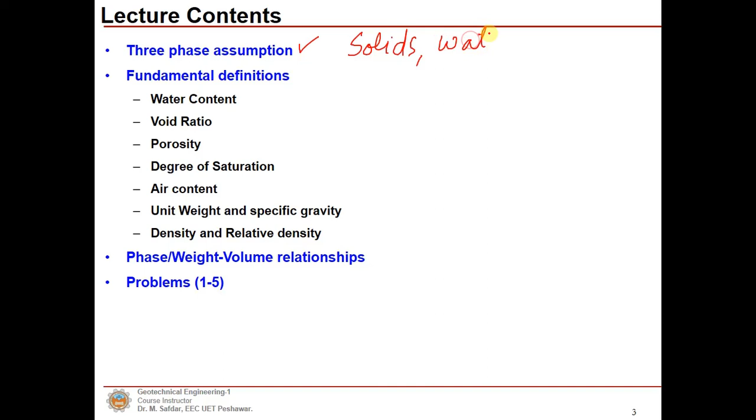So first we will start with understanding the three-phase assumption, which is that soil contains solids, water, and air if it's partially saturated or unsaturated soil. Then we will study and learn about fundamental definitions such as water content, void ratio, porosity, degree of saturation, air content, unit weight, specific gravity, density, relative density, and we will derive a few phase or weight volume relationships.

At the end of today's lecture, we will solve a few problems related to those relationships.

So starting with the three-phase assumption, soils generally contain soil grains, water and air, which are known as the three phases. Now the relative proportions of these three phases play an important role in the engineering behavior of the soils.

We also discussed about the void spaces. These void spaces may contain water and air, and in dry condition water will be missing, only air will be there, and in fully saturated condition air will be absent and water will be present there in the void spaces.

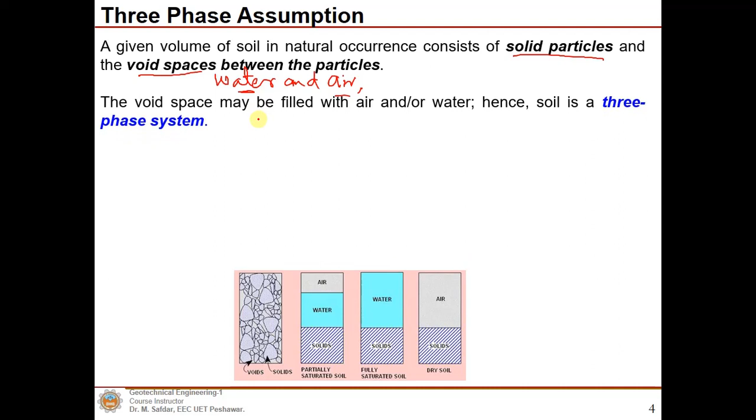Now if there is no water in the void space, that is a dry soil. If the void spaces are filled with water, then we can call that a fully saturated soil. Moist or partially saturated soils have three phases like air, water and solids.

What we are trying here is we are idealizing the real soil sample.

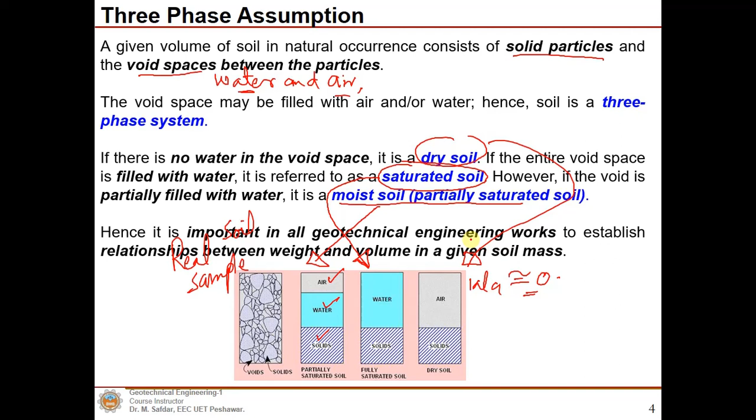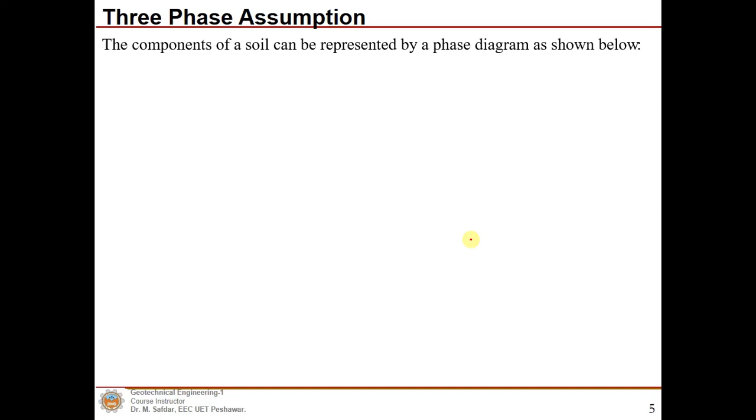So it is important in all geotechnical engineering works to establish relationships between the weight of air, weight of water, weight of solids, where the weight of air is negligible, it is taken as 0. So if we are having weight and volume relations, that will affect the engineering behavior of soils. Therefore, a geotechnical engineer must understand and learn about the phase relationships or weight volume relationships of each phase.

This is a real soil sample having solid particles present here, and void spaces. If they are filled with water, that would be fully saturated soil.

Here as well, these void spaces, if they are filled with water, you can call that saturated soil. If it's filled with air, then it's dry soil.

So we can idealize this soil having the total weight, and we can also idealize that as total volume in terms of a phase or block diagram, where we are saying that, for example, this is weight of air, which is negligible, equal to 0. Weight of water from here till here, that is weight of water, and weight of solids.

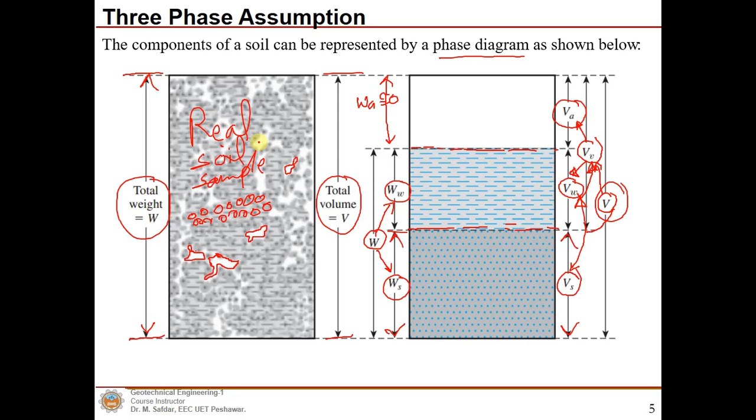Now the volume of solids here, and if we add the volume of voids, that will form the total volume of the soil mass. So this is the real soil sample, and this is the idealization to draw or to understand the relationship between the weights and volume of these phases, for example, the air, water, and solids. Now, why is it important? It's important in understanding the engineering behavior of soils.

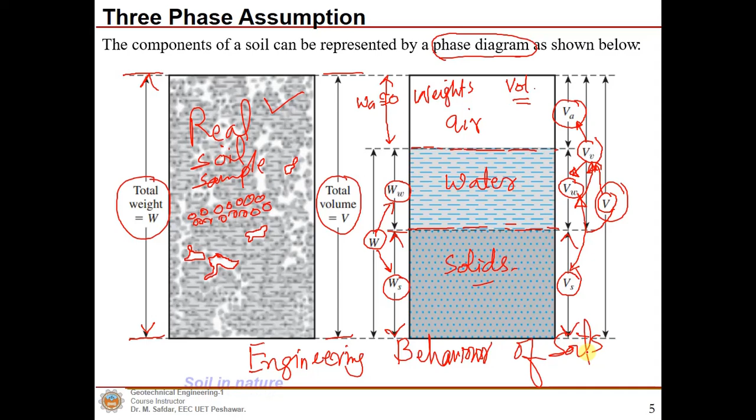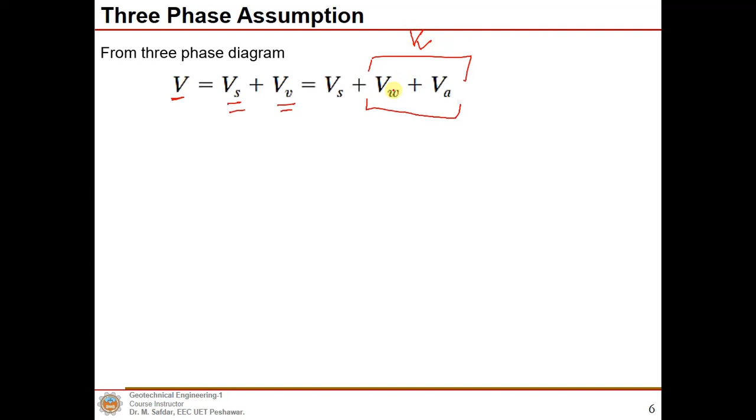Now we can write the explanation which is made in our previous slide in an equation form, that the total volume can be divided into the volume of solids and volume of voids. Similarly, we can write the volume of voids as the volume of water plus volume of air. A phase diagram is given here as well, where the total volume is divided into volume of voids and volume of solids, and then the volume of voids is divided into volume of air and volume of water.

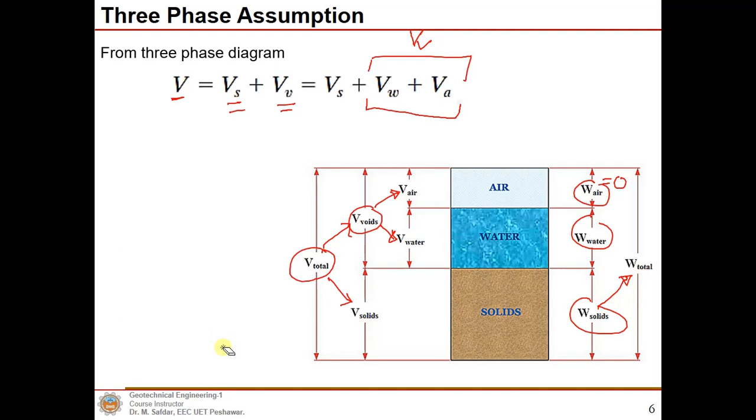So please note down this equation and this equation as well. It's important from the exam point of view.

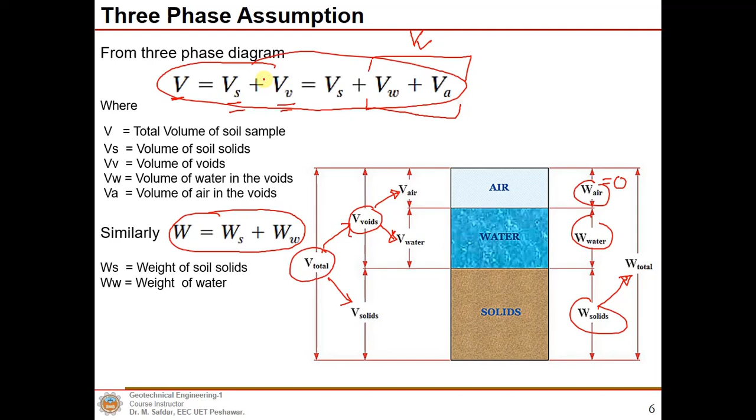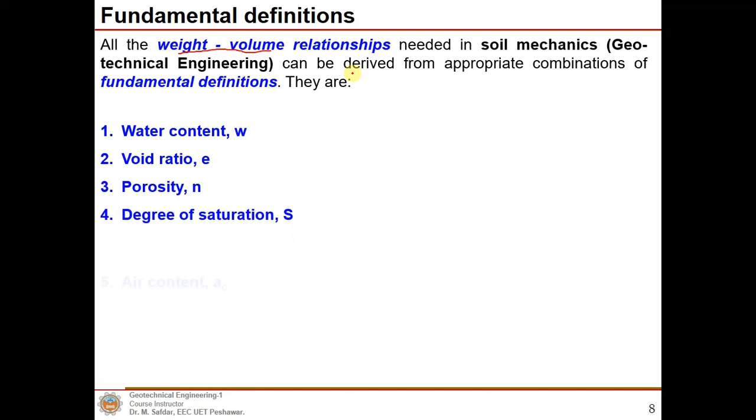Now we need to understand a few fundamental definitions between the weight and volume. All these weight and volume relationships needed in soil mechanics or geotechnical engineering can be derived from appropriate combinations of fundamental definitions, and they are water content, void ratio, porosity, degree of saturation, air content, unit weight, specific gravity, density, relative density, and so on.

Starting with the water content, it's pretty much simple that the water content is defined as the ratio of the weight of water to the weight of solids. For example, we can draw a three-phase diagram. This is solids, this is water. For example, if we are having weight of air, which is negligible, it's equal to 0. Weight of water, and this one would be weight of solids.

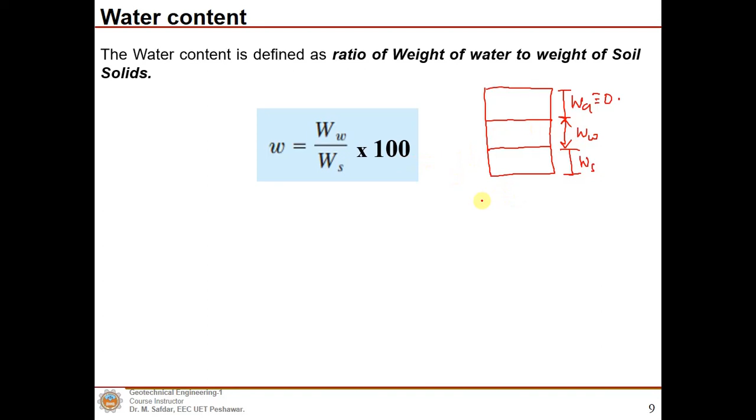Now, if we are comparing the weight of water with the weight of solids in a soil mass, that is known as the water content. And the water content is determined by weighing a sample of the soil and then drying the sample in an oven at a temperature of 105 till 110 degrees Celsius and reweighing it. A drying period of 24 hours is normally adequate for most soils.

Void ratio is defined as the ratio of the volume of voids to the volume of solids. If you again draw the three-phase diagram, this is the volume of solids, this is the volume of water, and this one is the volume of air. Now, if you combine this, this is the volume of voids. If you are comparing volume of voids with the volume of solids, that would be equal to the void ratio.

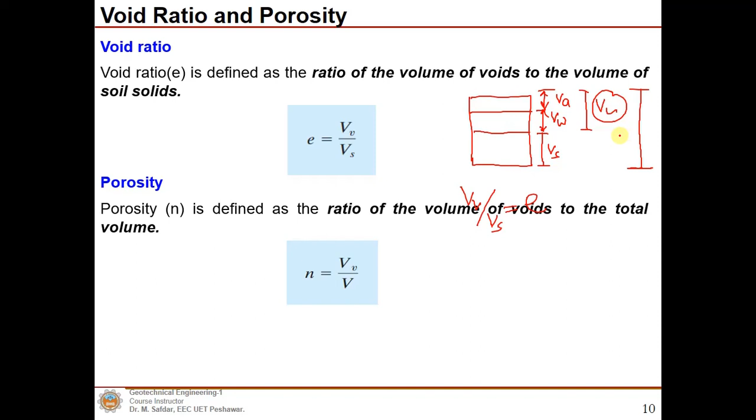And if you are comparing the volume of voids to the total volume, how many voids are present in the total volume of this soil mass, that is known as porosity. Void ratio and porosity will not change if water is added or removed from a soil, because the volume of voids includes both the volume of water and air. These are unitless quantities presented in decimals.

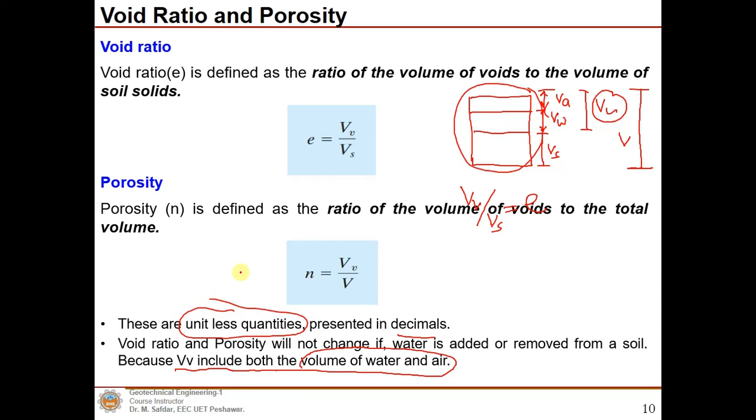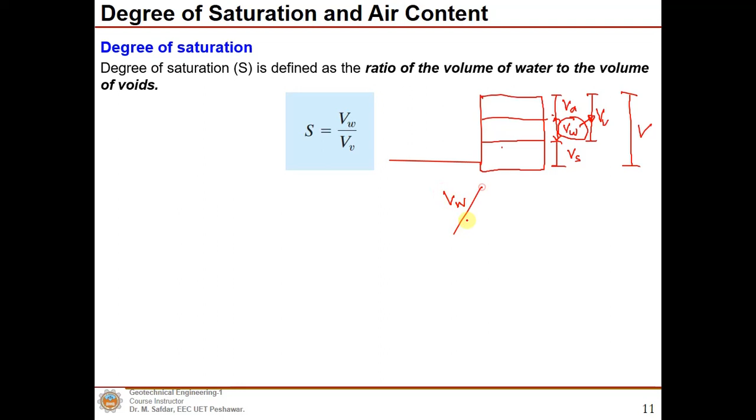Now, the degree of saturation. If we draw again the phase diagram, this is the volume of solids, this one is the volume of water, this one is volume of air. If you combine them both, this is volume of voids. We are having total volume. What is the volume of water present in the volume of voids? That would be known as the degree of saturation. Now, the degree of saturation can range between the limits of 0 till 1, or we can say 100% for a fully saturated soil condition.

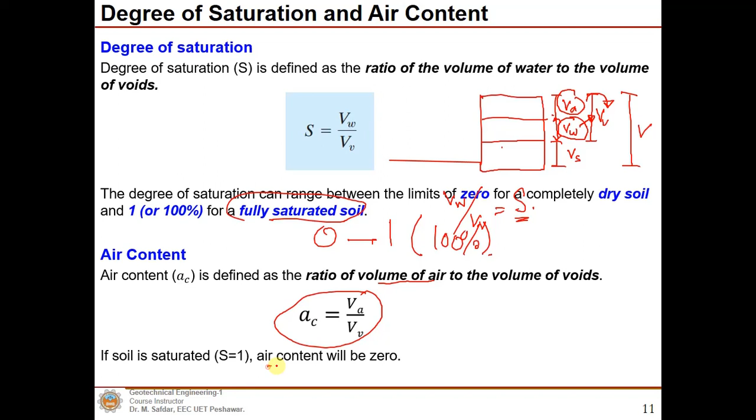Air content is defined as the ratio of volume of air to the volume of voids. If you are comparing volume of air and volume of voids, that is known as air content, or how much air is present in the voids. So if it is saturated, S is equal to 1, and the air content will be equal to 0.

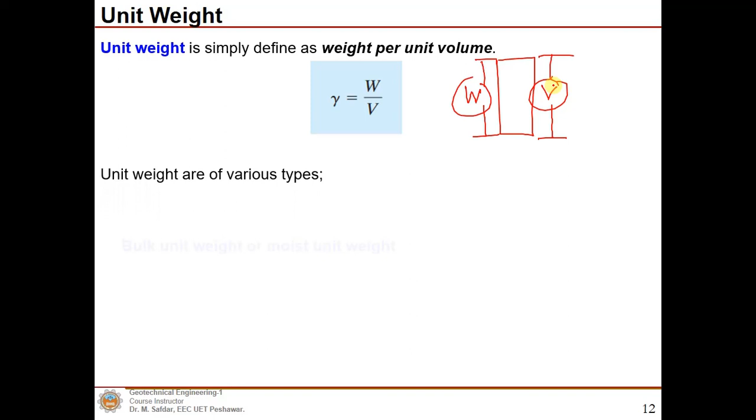Unit weight is simply defined as weight per unit volume. Did you know about the weight and the volume relationship? The weight of the soil and the volume of the soil, that is known as unit weight. Unit weights are of various types. For example, bulk unit weight or moist unit weight, dry unit weight, saturated unit weight, submerged unit weight.

Now, what is bulk unit weight? Bulk unit weight is defined as total weight of a soil mass per unit volume.

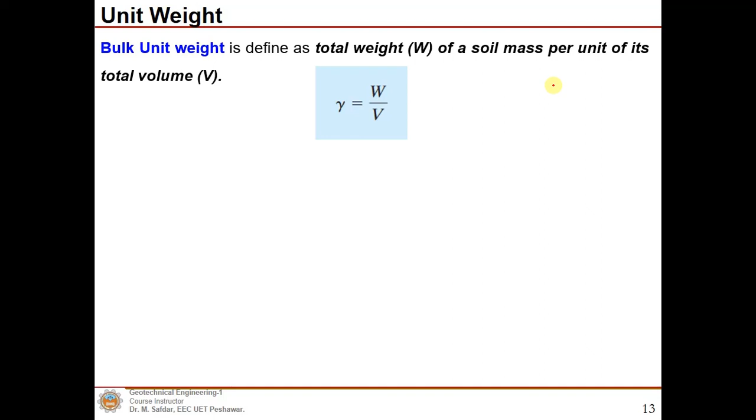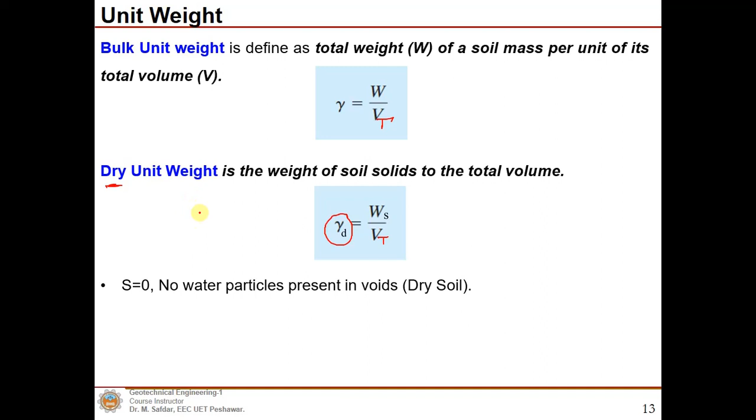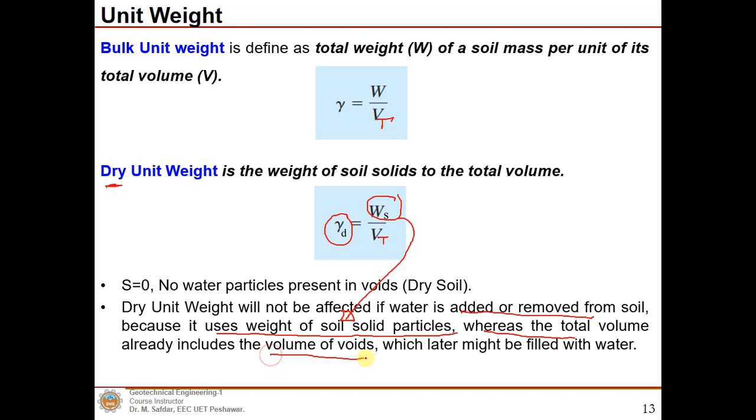Dry unit weight is the weight of the soil solids to the total volume. You can write total volume as well if you want. And in the dry case, it would be the weight of solids compared to the total volume, because the word dry is used, which means all the moisture has been dried up. So if S is equal to 0, no water particle is present in the voids, that is dry soil. Dry unit weight will not be affected if water is added or removed from soil, because it uses the weight of soil solids. Therefore, the dry unit weight value will not be affected if water is added or removed from the soil, because it uses the weight of soil solids, whereas the total volume already includes the volume of voids, which later might be filled with water as well.

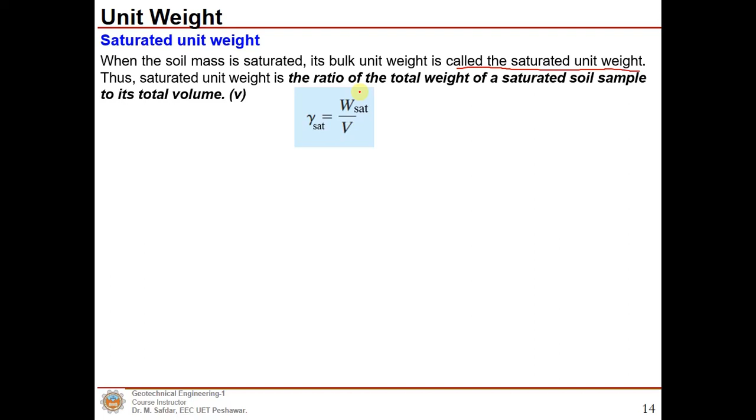Now, when the soil mass is saturated, its bulk unit weight is called the saturated unit weight. The saturated unit weight is the ratio of the total weight of a saturated soil mass to its total volume. And if S, our degree of saturation, is equal to 1, all the voids are filled with water.

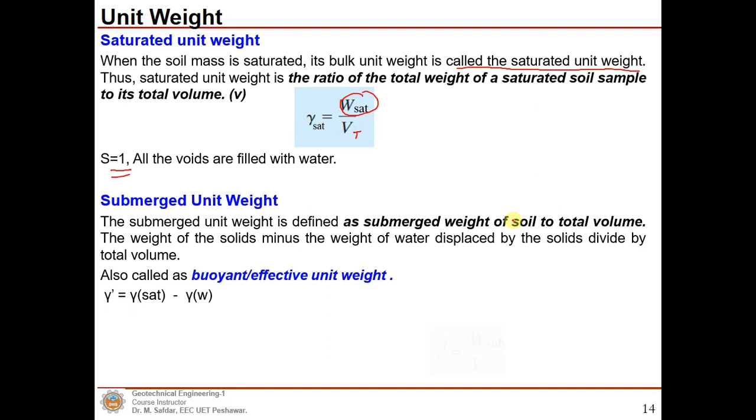Submerged unit weight is defined as submerged weight of soil to total volume. It equals the weight of the solids minus the weight of water displaced by the solids, divided by the total volume. We can also find the submerged, buoyant, or effective unit weight using this equation or using this equation, but this equation is predominantly used in geotechnical engineering and foundation engineering.

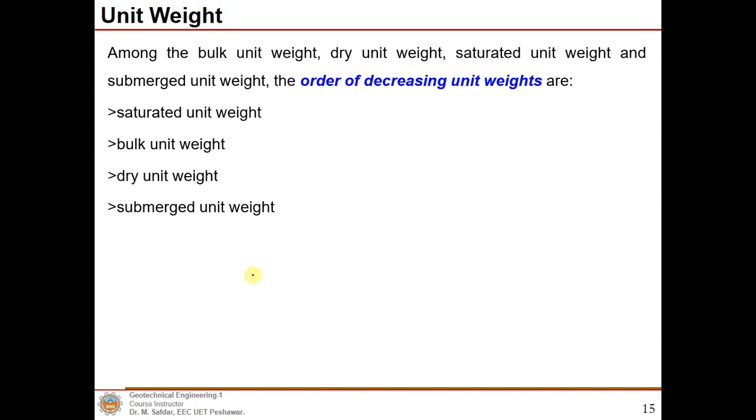Now, among the bulk unit weight, dry unit weight, saturated unit weight, and submerged unit weight, the order of decreasing unit weights is: the saturated unit weight is greater than the bulk unit weight, the bulk unit weight is greater than the dry unit weight, and the dry unit weight is greater than the submerged unit weight.

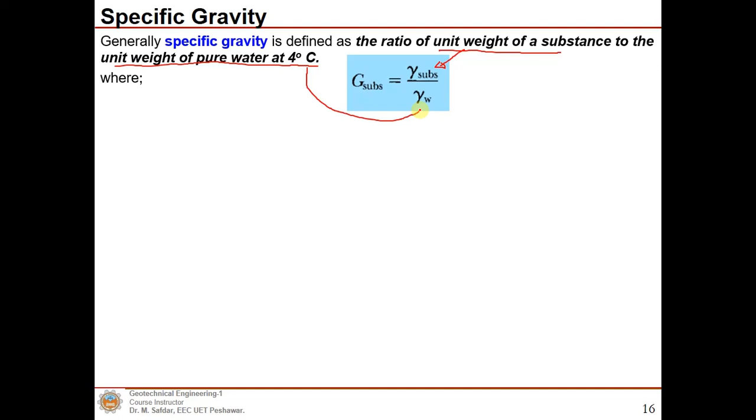There is another definition and term also used in deriving the phase relationships. That's the specific gravity, defined as the ratio of the unit weight of a substance to the unit weight of pure water at 4 degrees Celsius. That value is equal to 1 gram per cubic centimeter if we are dealing in grams and centimeters, and if you are dealing in kilonewtons and meters, then the value of 9.807 should be taken.

Specific gravity can also be defined as the ratio of the weight of the soil solids to the weight of water, and you can write gamma S as Ws divided by volume of solids. To replace that, you can simply write this equation in this form.

Now, the mass specific gravity can be defined as the ratio of bulk unit weight of the soil to the unit weight of water.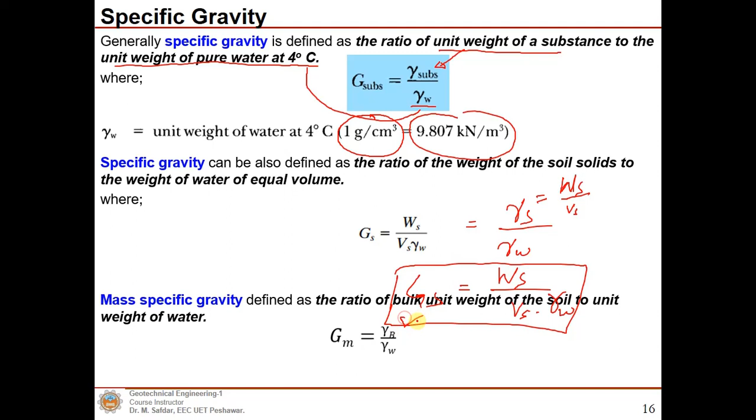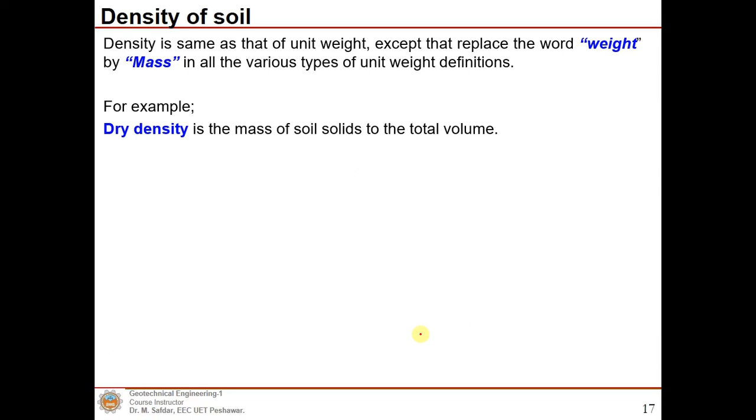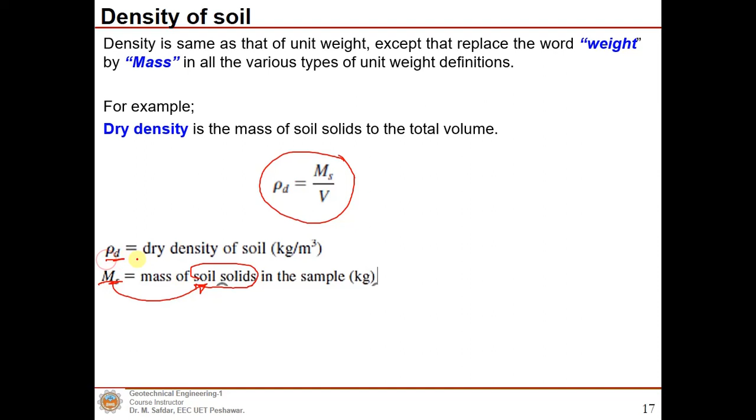Now, if we replace the word weight by mass in all the various types of unit weight definitions, for example, dry density is the mass of solids to the total volume, then that is known as the dry density of soil, where ms would be the mass of soil solids, and rho d would be the density of soil.

Relative density is defined as the ratio of the difference of void ratios of cohesionless soil in its loosest and natural state to the difference between the void ratio in its loosest and densest state. So this is the equation for the relative density.

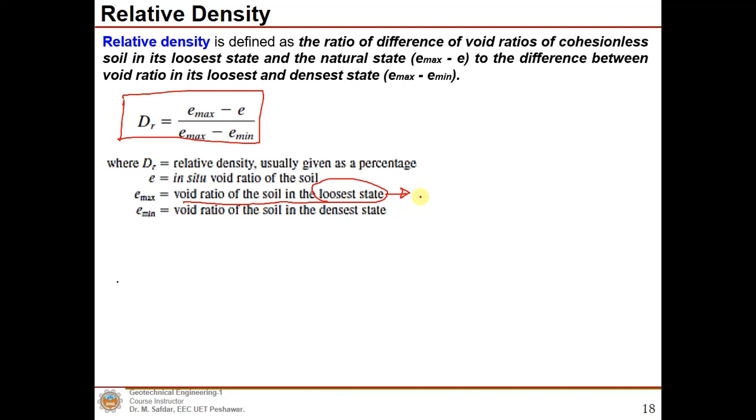E max is the void ratio of the soil in the loosest state, which will give us the minimum density of the soil. E minimum is the void ratio of the soil in the densest state, which will give us the maximum density, and E is the in situ or field void ratio of the soil, and Dr is the relative density, usually given as a percentage.

Now, relative density determines the compactness of the cohesionless soil. It is used to indicate the in situ denseness or looseness of the granular soil.

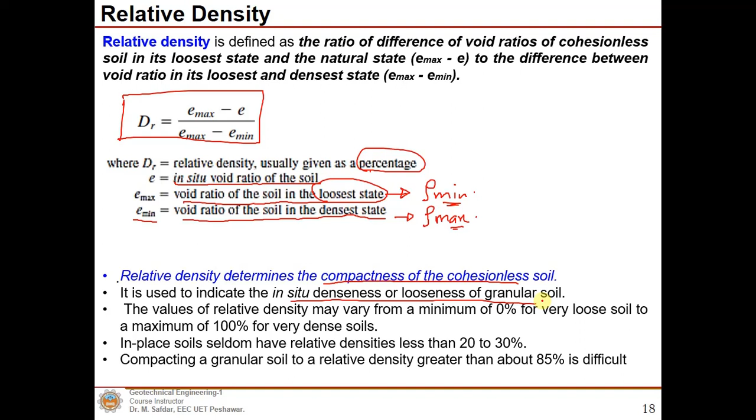The values of relative density may vary from a minimum of 0% for very loose soil to a maximum of 100% for very dense soils. Now, in place or in situ soils seldom have relative density less than 20 to 30%. Compacting a granular soil to a relative density greater than about 85% is also a very difficult task.

Now, the weight of water can be written in the form of water content into the weight of solids, and we already know that weight of solids can be equal to Gs into gamma of W.

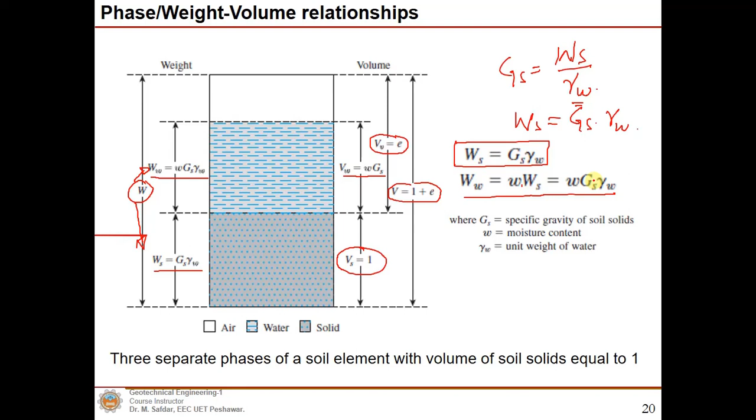Now we can also derive further equations for the void ratio and porosity. We already know that the void ratio is equal to volume of voids to volume of solids, and volume of solids can be written as the total volume minus volume of voids. If we divide the volume of voids by the total volume, and also divide this term by the total volume, we get 1, and volume of voids to the total volume is equal to N, which is porosity.

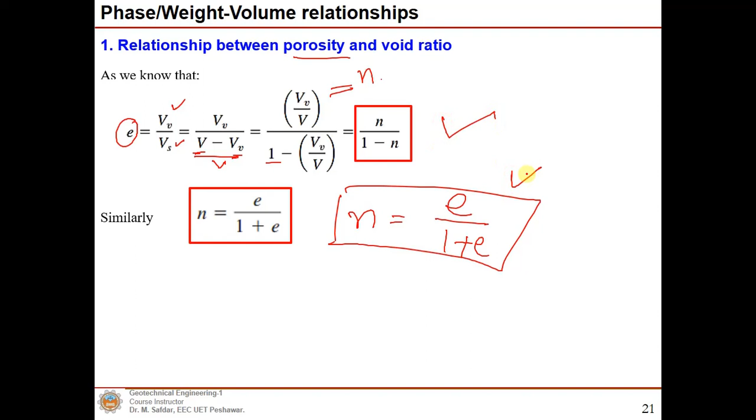We can also write a relationship between the void ratio and porosity, and that is equal to E divided by 1 plus E. These are very important equations or relationships which might be helpful for solving problems during an exam, quiz, or an assignment.

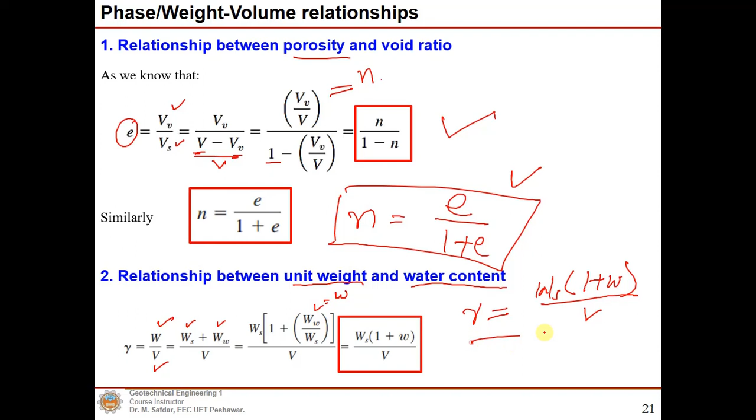In another relationship, unit weight and water content are used. Unit weight, we already know, is weight per unit volume, our total volume, so the weight is equal to weight of solids plus weight of water. Now you can take the weight of solids common, so you get weight of water divided by weight of solids, and we already know that is equal to the water content, so we can write that the unit weight is equal to WS into 1 plus W divided by total volume.

So it's also an important relationship. Now the relationship of unit weight, dry unit weight, and moisture content can be written in this form. There is another famous equation: SE is equal to WGS over S, where S is the degree of saturation, E is the void ratio, W is the water content, and GS is the specific gravity.

Now if you want to derive this equation, we can write that the water content is equal to weight of water compared to the weight of solids, and this weight of water can be written as unit weight of water into the volume of water, or the weight per unit volume. If you're talking about unit weight of water, it's weight of water divided by volume of water, and the weight of water is equal to gamma of water into volume of water. So that's what's written here.

If we further simplify, the water content is equal to the unit weight of water into the degree of saturation into the volume of voids, that expression can be taken from here. And the specific gravity is equal to the unit weight of solids to the unit weight of water. Further, if we simplify, we come up with the equation: water content is equal to S into volume of voids divided by GS into volume of solids.

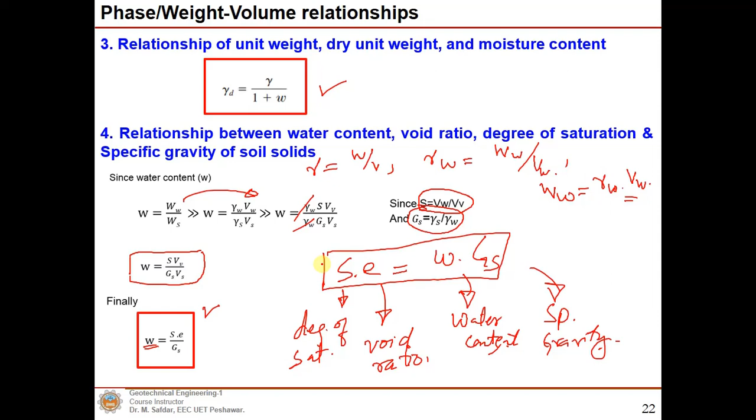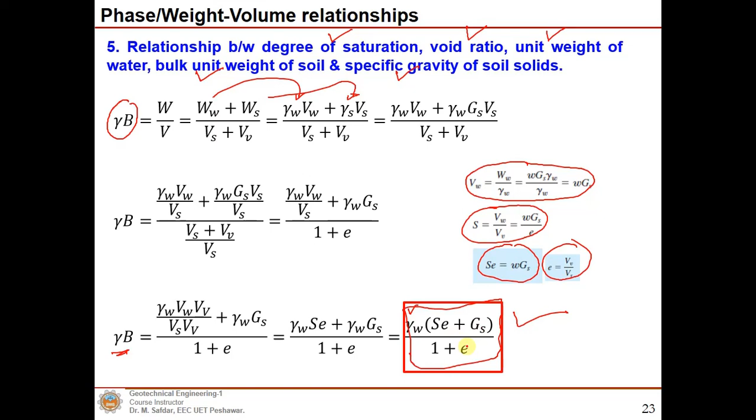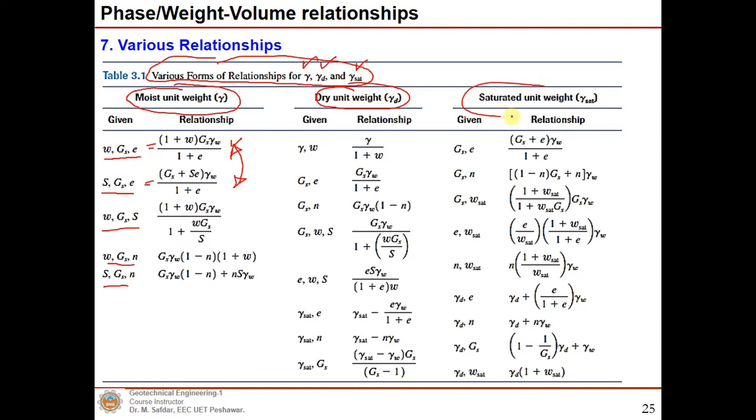There are several other relationships or various forms of relationships for the bulk unit weight, dry unit weight, and saturated unit weight. For moist unit weight or bulk unit weight, the relationship between water content, specific gravity and void ratio is this one. Degree of saturation, specific gravity and void ratio relationship is this one, which we already derived. There are more relationships available between these terms for moist, dry, and saturated unit weight.

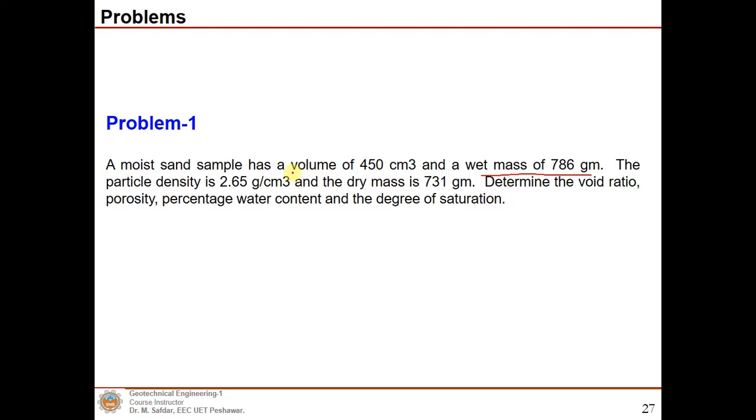Let's start with a problem. Problem number 1: a moist sand sample has a volume of 450 cubic centimeters and a wet mass of 786 grams. The particle density is 2.65 grams per cubic centimeter and the dry mass is 731 grams. We need to determine the void ratio, porosity, percentage, water content, and the degree of saturation.

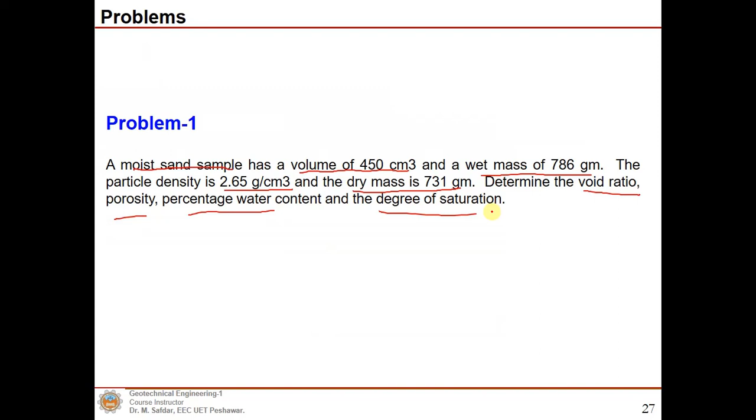The mass of water can easily be found from the wet mass minus the dry mass, which is 786 minus the dry mass, equal to 55 grams. Now the volume of water equals mass of water divided by the density of water, and we already know that the density of water is equal to 1 gram per cubic centimeter.

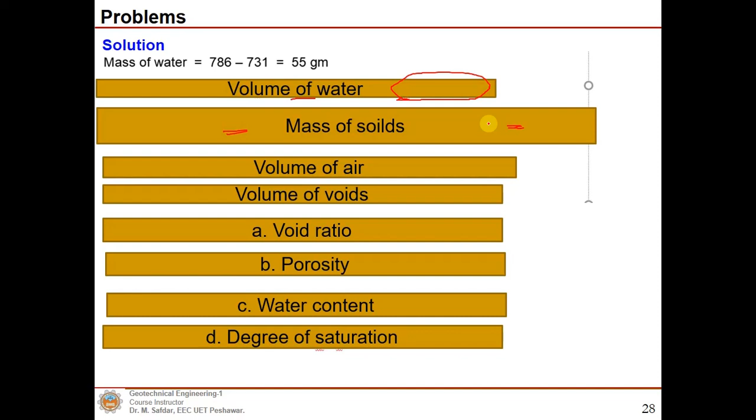The mass of solids equals 731 grams, and the volume of solids will be equal to mass of solids divided by the density of the solids, and the density of the solids is given as 2.65.

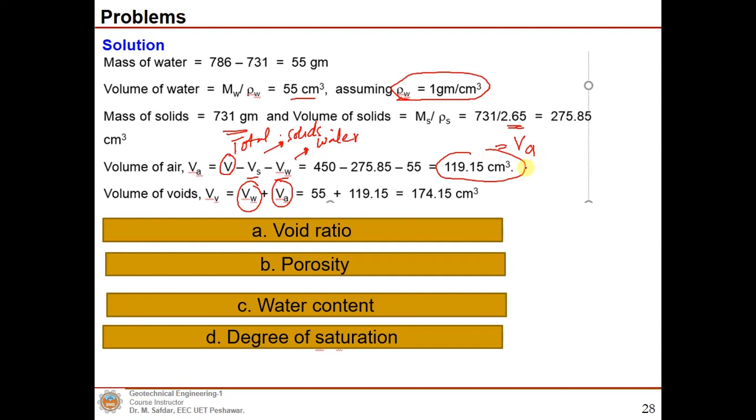Now the volume of air we can find by subtracting the volume of solids and volume of water from the total volume. This is the volume of solids and this is the volume of water, and if we subtract water and solids, we are left with the volume of air. Now the volume of voids, if we add the volume of water and volume of air, is this much, and if we add these two, we get the volume of voids.

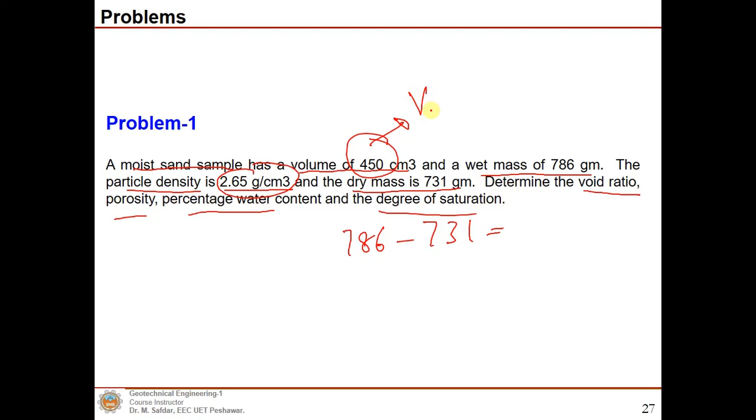Now we can easily find the void ratio, because we know that void ratio equals volume of voids divided by volume of solids, and that is 0.63. Porosity is volume of voids to the total volume. The volume of voids is this one, and the total volume is 450, which is the total volume of the moist soil.

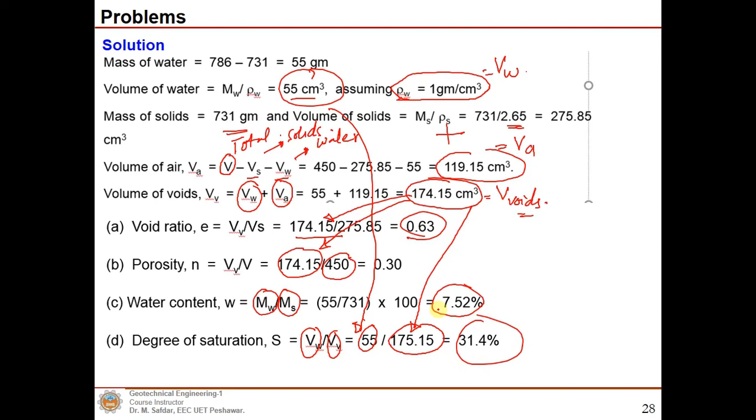Water content we can find from the mass of water divided by the mass of solids, and that is 7.52%. Degree of saturation equals volume of water divided by volume of voids. The volume of water is here, and we compare it with the volume of voids, which is this one, giving a degree of saturation of 31.4%. That's how you can solve and find out different properties.

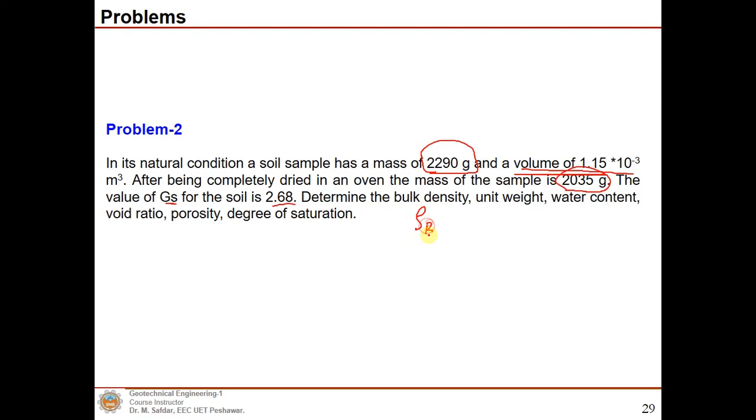Another example: in its natural condition, a soil sample has a mass of 2,290 grams and a volume of 1.15 times 10 to the power minus 3 cubic meters. After being completely dried in an oven, the mass of the soil is 2,035 grams. The specific gravity of the soil is 2.68. We need to determine the bulk density, unit weight, water content, void ratio, porosity, and degree of saturation.

The bulk density can be found using the equation of mass per unit volume. We know the mass is 2,290 grams, and the volume is 1.15 times 10 to the power minus 3. So it comes out to 1,990 kilograms per cubic meter, or 1.99 megagrams per cubic meter.

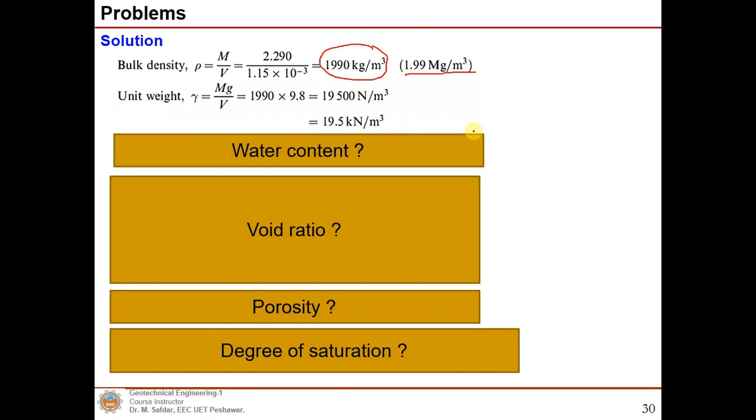Now we already know that unit weight is equal to weight per unit volume, and weight is equal to mass into gravity. Therefore gamma is the mass into gravity, that is 9.8, and 19,500 Newton per cubic meter, or 19.5 kilonewton per cubic meter, will be the unit weight of the soil.

Now for the water content, if we compare the mass of water with the mass of solids, we can easily find out the mass of water and compare it with the mass of solids, and that is 12.5%.

We already derived an expression for the bulk unit weight, relating the unit weight of water, specific gravity, water content, and the void ratio. The void ratio is equal to 0.52, because unit weight of water is 9.81, GS is 2.68, the water content is 12.5%, and the bulk unit weight is 19.5. So we can easily find out the void ratio and calculate that.

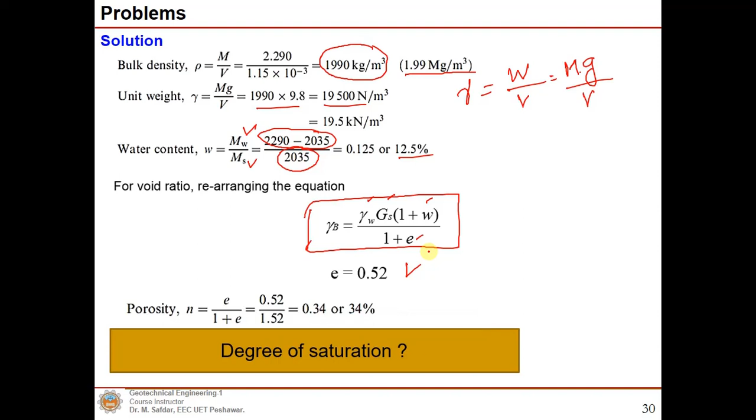Porosity can be found using this expression, this relationship, and it's 34%.

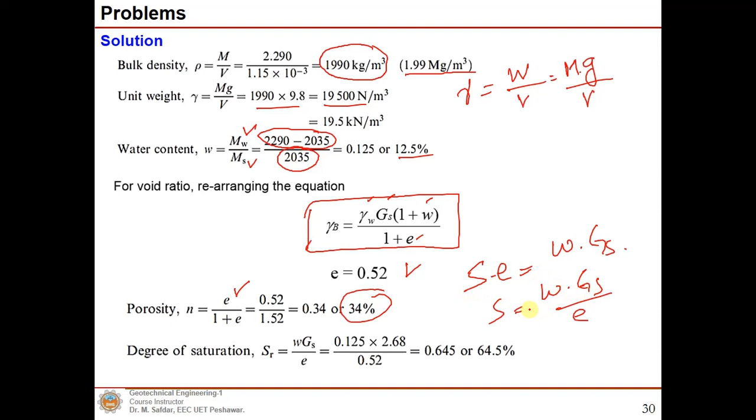The degree of saturation, as I mentioned earlier, SE is equal to WGS, so S is equal to W into GS divided by the void ratio. We already found out the void ratio, the water content, and the specific gravity, so we can find out the degree of saturation, which is equal to 64.5%.

Now we need to calculate the dry unit weight, the saturated unit weight, and the effective unit weight of a soil having a void ratio of 0.70 given, and the value of GS, specific gravity, is given.

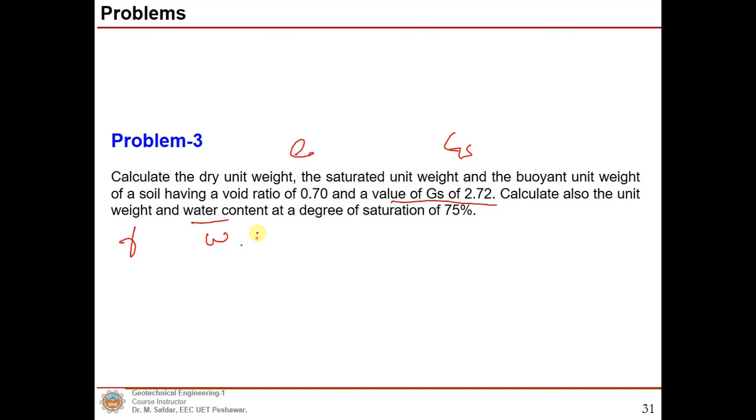We need to calculate the unit weight or the bulk unit weight, and the water content at a degree of saturation of 75%. So S is equal to 75%, our degree of saturation.

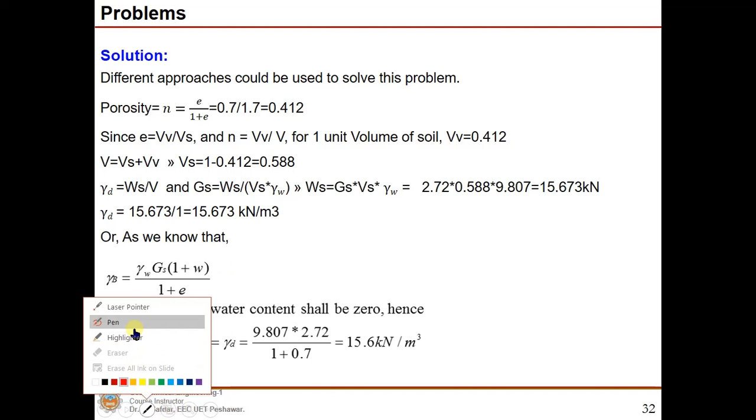Now different approaches can be used. We can solve it for porosity: N is equal to E divided by 1 plus E, and we will come up with the porosity first. The porosity, or N, is equal to 0.412. Now we already know that E, the void ratio, is equal to volume of voids divided by the volume of solids, and porosity is equal to volume of voids to the total volume.

Now for 1 unit volume of soil, volume of voids will be equal to 0.412. Now the total volume is equal to volume of solids plus volume of voids, and we know that volume of voids equals 0.412, and the total volume is taken and assumed as 1. So the volume of solids will be equal to this much volume of voids, and the volume of solids will be equal to 0.588, and if you sum these two, that will give you the total volume.

Now we can find out the weight of solids as well, and we know that weight of solids is equal to GS into VS into gamma of water. GS is 2.72, this is specific gravity. VS is the volume of solids, that is 0.588, and unit weight of water is 9.807, so 15.673 kilonewton would be the weight of solids.

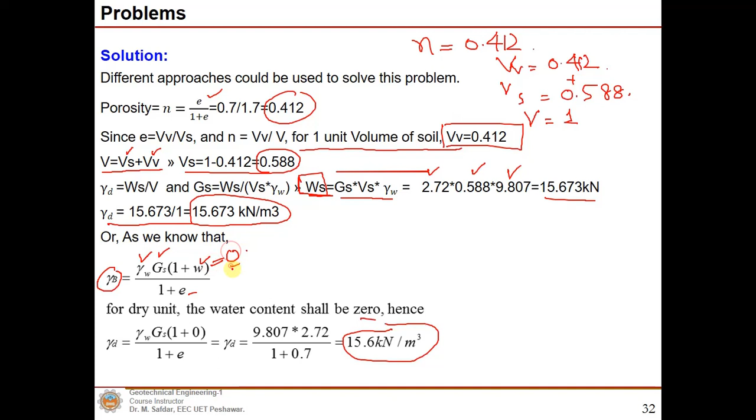We can find out the effective unit weight or the buoyant unit weight from the relationship of subtracting unit weight of water from the saturated unit weight, and that would be equal to 9.92 kilonewton per cubic meter.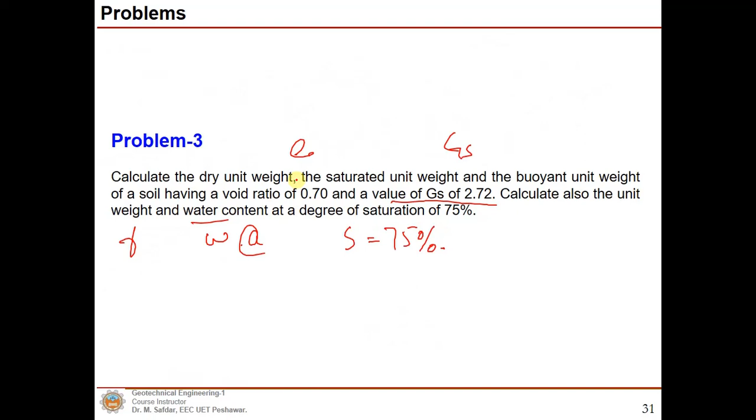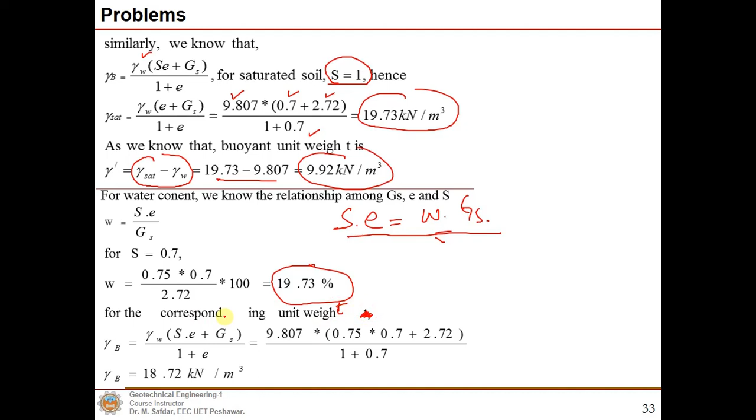Unit weight. We need to calculate the unit weight and water content at a degree of saturation of 75%. The water content is known from this relationship. Now we need to find the unit weight. The bulk unit weight is gamma water times SE plus GS, all divided by 1 plus E.

So you can use the previous equation, but now we need to put 0.75 for 75% degree of saturation, and we will calculate the bulk unit weight at 75% degree of saturation. This comes out to 18.72, and the water content at this saturation level is 19.73%.

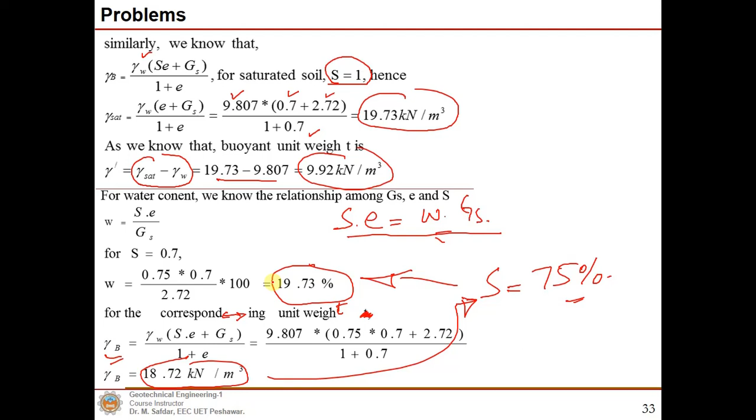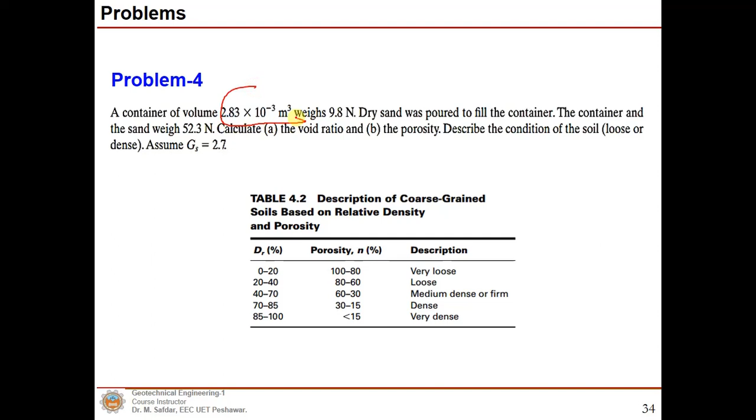In problem number 4, a container of volume 2.83 times 10 to the power minus 3 cubic meters weighs 9.8 Newton. Dry sand was poured to fill the container. The container and sand together weigh 52.3 Newton. We need to calculate the void ratio and porosity, and describe the soil condition as loose or dense, assuming specific gravity equal to 2.7.

We talked about relative density earlier in this lecture. Here is the description of coarse-grained soil based on relative density and porosity. For 0 to 20% relative density, the soil is known as very loose, with porosity of 80 to 100%.

From 40 to 70% relative density, the soil is medium dense or firm, with porosity between 30 to 60%. For 85 to 100% relative density, the soil is very dense, with porosity less than 15%.

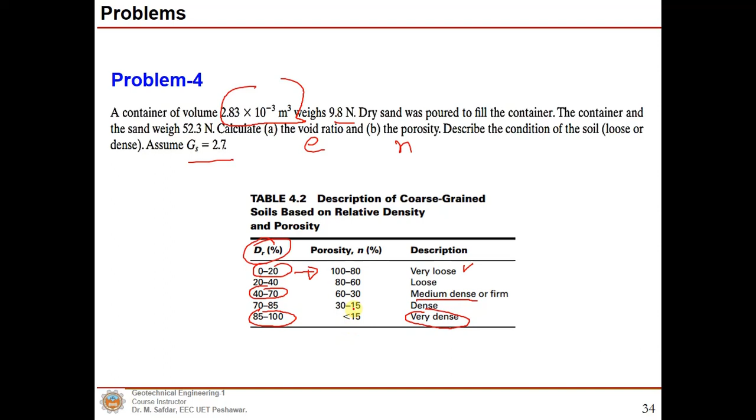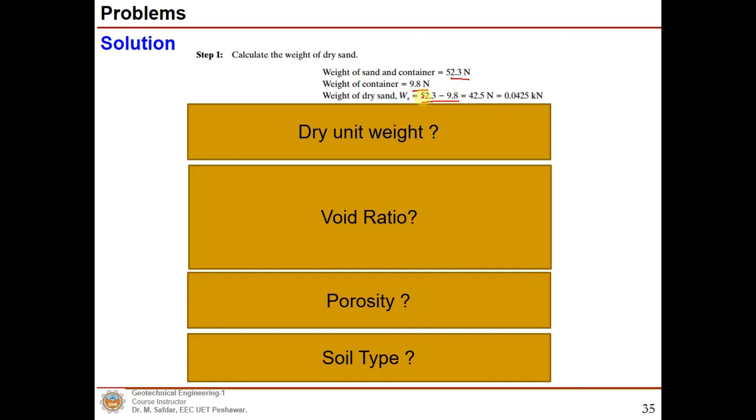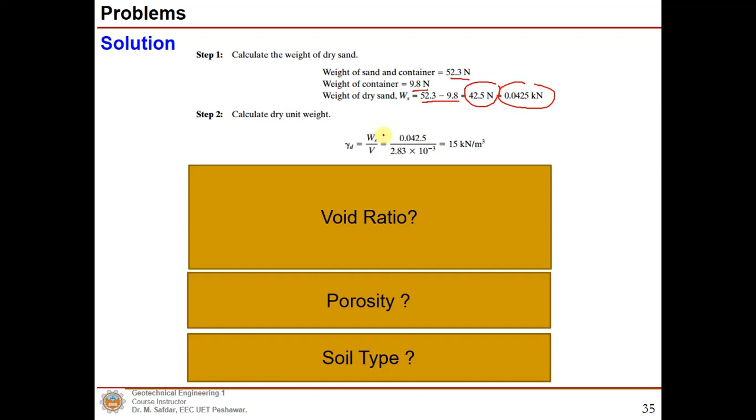The unit weight of dry sand can be found from the weight of sand plus container. The weight of the container is 9.8 Newton. The weight of dry sand, or weight of solids, we get by subtracting 9.8 from 52.3, giving the result in newtons and kilonewtons. Now the dry unit weight can be found using weight of solids divided by total volume, giving 15 kilonewton per cubic meter.

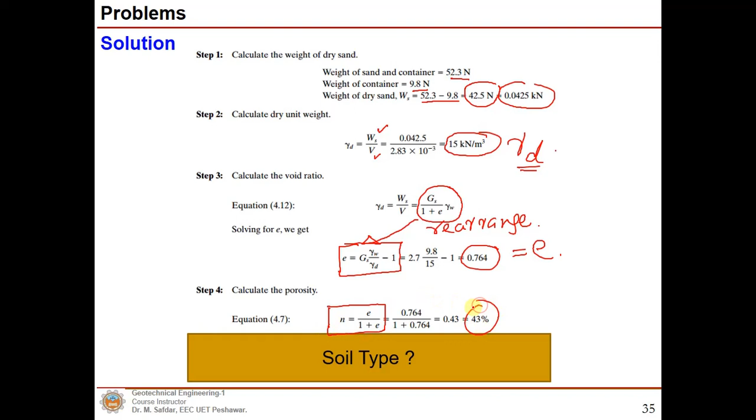We already know that dry unit weight equals weight of solids divided by volume, and we derived this expression. Now we can rearrange this relationship and solve for E. GS is known, gamma water is known, gamma dry unit weight is known, so we come up with the E value, which is the void ratio. Once E is known, we use this relationship to find the porosity. With porosity at 43%, the sand will be in medium dense or firm condition.

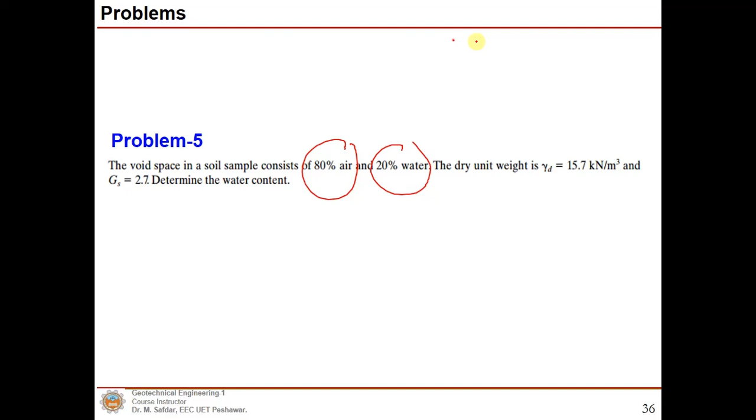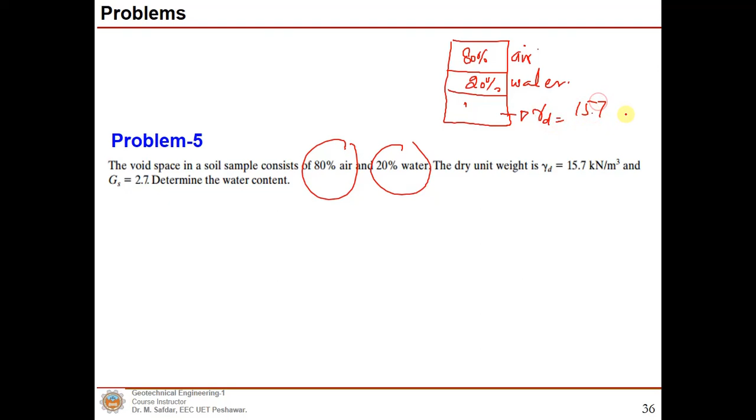In the last problem, the void space in a soil sample consists of 80% air and 20% water. They are talking about the void space, which consists of volume of solids, volume of water, and volume of air. So 80% is air, 20% is water, and the dry unit weight is given along with the specific gravity Gs.

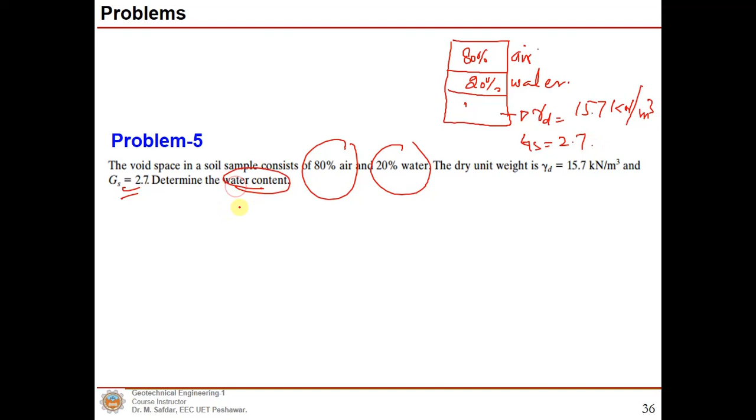Now we need to determine the water content. We already know that gamma d, the dry unit weight, equals Gs times gamma water divided by 1 plus E. Rearranging this equation, E equals Gs gamma W divided by gamma d minus 1. With Gs equal to 2.7, gamma W equal to 9.8, and gamma d equal to 15.7, E comes out to this value.

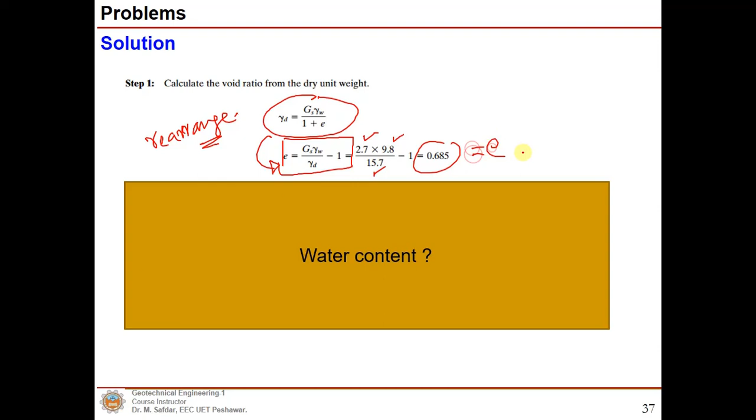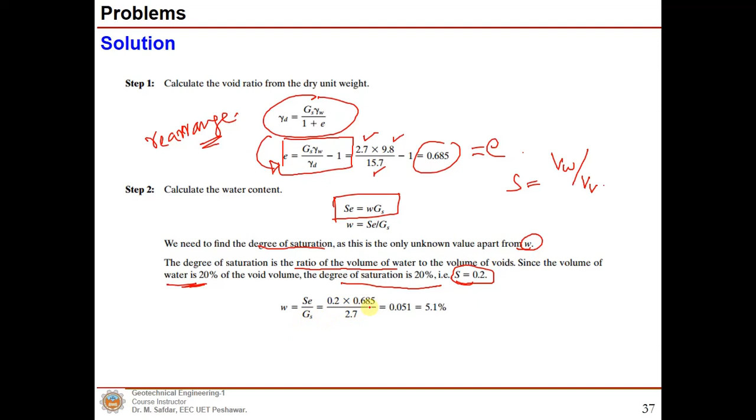Now solving for water content, we use the equation SE equals W times Gs, so W equals SE divided by Gs. We need the degree of saturation, the only unknown apart from W. The degree of saturation is the ratio of volume of water to volume of voids. Since the volume of water is 20% of the void volume, the degree of saturation S is 0.2, and the water content comes out to 5.1%.